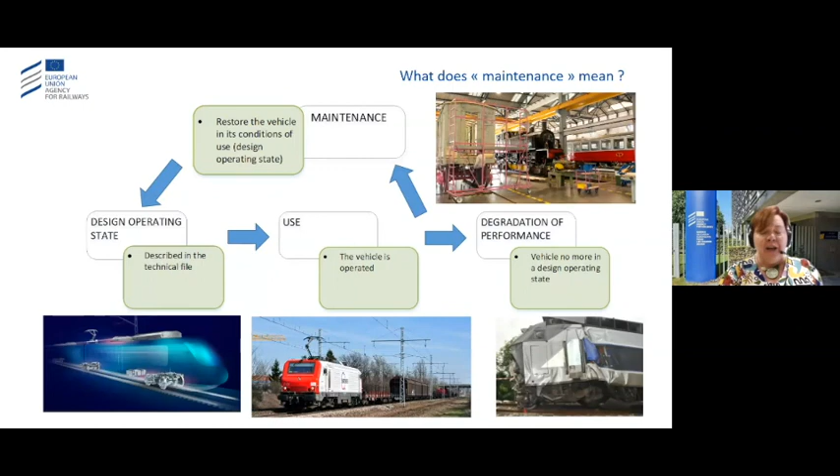Thank you, Mr. Doppelbauer, for this brilliant introduction. You say everything. So now with Jean-Marie, before giving the floor to our speaker, I would like to show you some slides and first explain what maintenance means, and give the floor to Jean-Marie. Jean-Marie is a bit the daddy of the ECM regulation and with a lot of experience, not only at the agency but also in maintenance workshops, will explain what maintenance means. Jean-Marie?

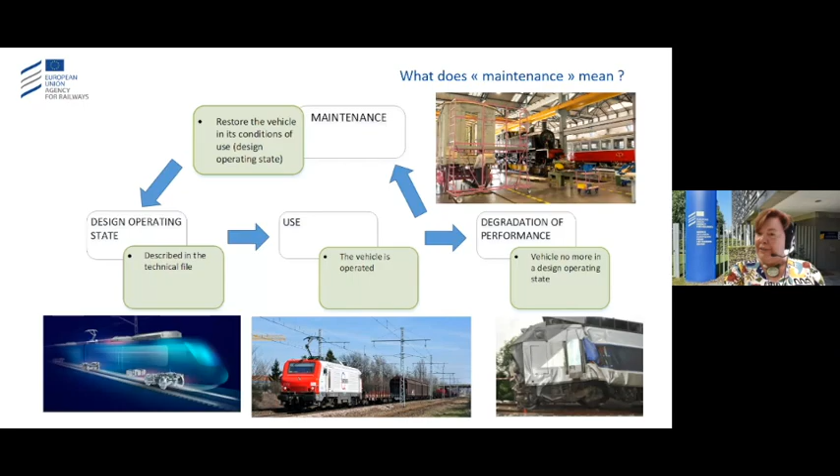I will speak about the maintenance and the ECM. Mr. Doppelbauer has spoken about the design operating state. What is this state? This state covers all the conditions that are necessary for the vehicle to be operated in a safe way to ensure safety, but also to meet the requirements addressed by the customers in terms of cost, in terms of type and frequency of operations, in terms of speed, and so on. So the use of the vehicle is clearly linked to this design operating state.

But as for any technical system, railway vehicles see a degradation of performance all along their use. Degradation of performance that can at certain moments impair the safety, but also the other requirements of the customers. And that's why we have the maintenance, and the maintenance is so important because it's the set of operations that aims to restore the vehicle to its design operating state or to a state just close to the design operating state while ensuring at least the safety, but also all the other requirements of the user.

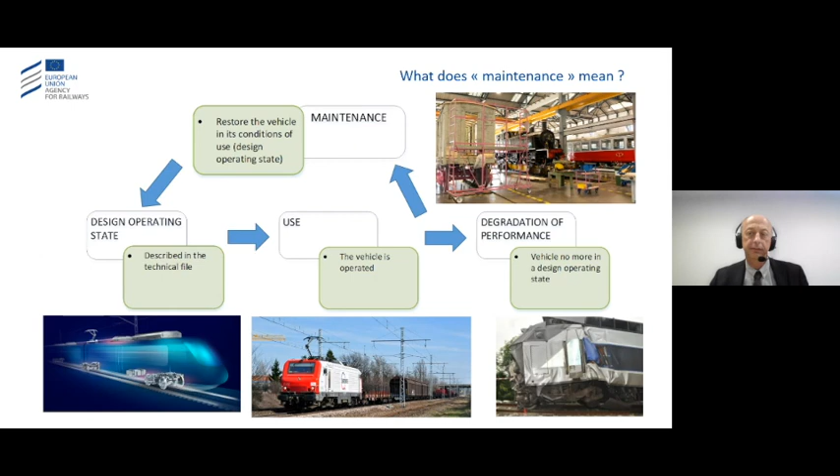Now, you know what maintenance means. But which type of vehicles? When we speak about railway vehicles, we speak about wagons, of course, wagons whose definition you can find in the TSI wagons, but we speak also about other types of vehicle, like locomotives, passenger cars, train sets, multiple units, EMU or DMU, but also on-track machines. All these vehicles need to be maintained by only one ECM. It is important to have in mind that in the National Vehicle Register, these vehicles must be registered with the name of one ECM.

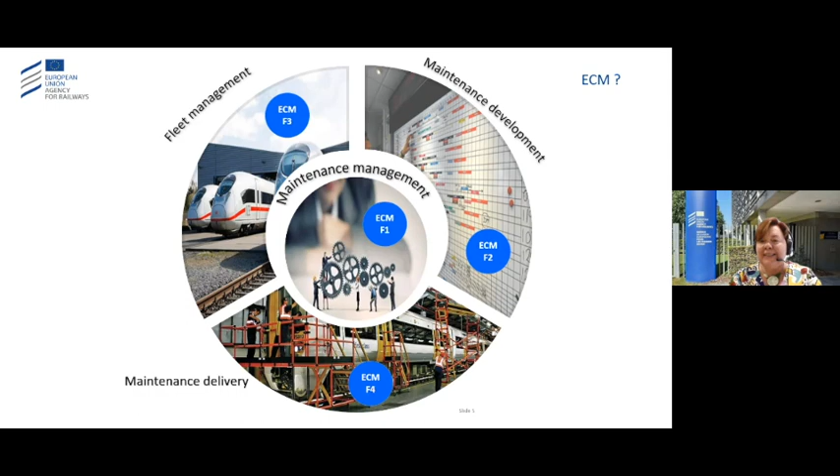Thank you, Nathalie. Now, the maintenance management system is covered by the four functions, as said by Nathalie before. We will focus a bit more on maintenance development, but on this slide you can see the link, the interface between the four management levels. The maintenance delivery needs to get maintenance orders, requests to maintain the vehicle. And of course, they also need to have the vehicles. This is provided by fleet maintenance management. But to define the tasks to be given to the maintenance delivery level, there is a strong need for a specific set of processes within the ECM, covered by maintenance development.

The output of maintenance development is, as has been said, the maintenance file, which contains on one side detailed technical documentation necessary for the maintenance, kept up to date, but also what we call the maintenance plan, meaning a set of technical activities with defined frequencies or defined milestones.

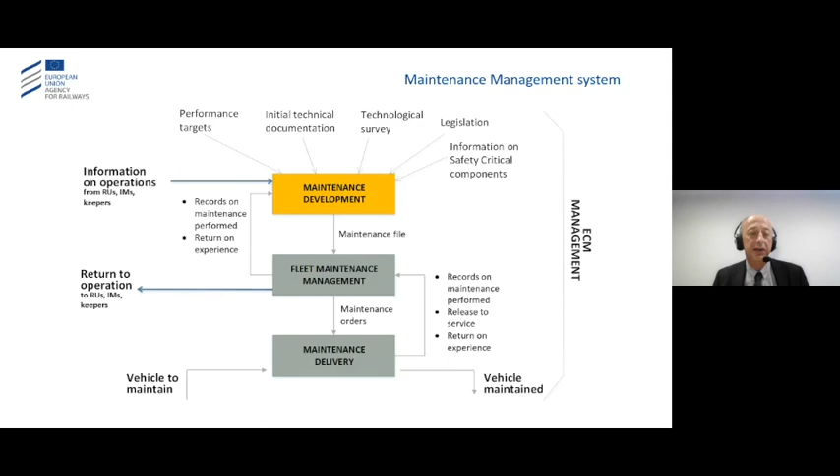Now I think that we can go, as we have fixed a bit what maintenance development means, to the experience of the ECMs represented in this webinar. Yes. Thank you, Jean-Marie. Time is running, and everybody knows that we can speak a long time about this important point. Now, I'm sure that you are very interested to hear the sector, and I would like first to give the floor to Geoffrey Tresantini, the ECM manager for CFL Cargo in Luxembourg. Geoffrey, please, could you briefly present yourself and describe your activities as ECM manager?

So I work as ECM manager for CFL Cargo since 2012. We are managing a fleet of 2,500 wagons and a few locomotives too, but those are not directly under my responsibility, so I will keep my message on wagon maintenance. The question was to maintain or not to maintain, and I think it was really interesting to answer directly: yes, we need to maintain, but we need to define how, and what is the best way to answer the most common expectations we can have with the maintenance issue.

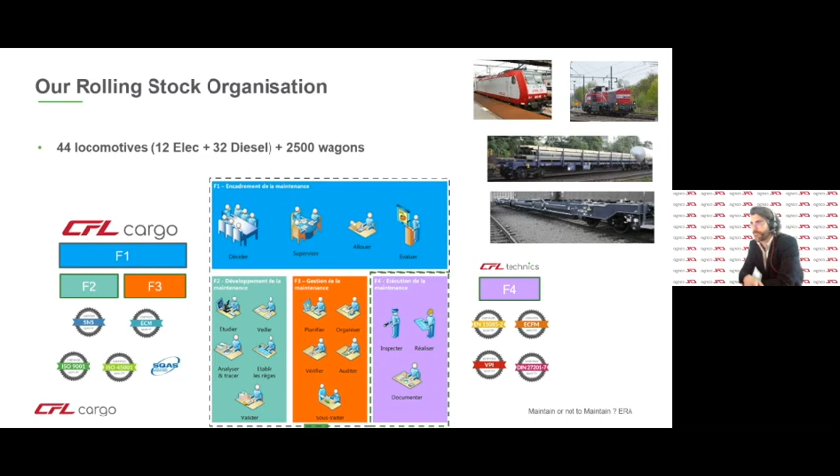First, when you are in charge of function 2, you have to consider that sometimes you have to make changes in the maintenance plan, especially because the whole railway environment is moving. You have new kinds of vehicles, new kinds of activities, new routes to follow. And due to this evolution, sometimes you have to rethink the way you take into account specific aspects like the use of wagons and the conditions, and redefine your maintenance plan to make it really

I think we lost you, Geoffrey. We cannot hear you and your camera looks frozen. So maybe there is a slight network issue, which is not a problem. Can you join again? Are you back? No, don't think so. Maybe Natalie, I will give you back the floor and we can go to the next speaker. And then if Geoffrey comes back, he will be able to end his presentation, right? Okay, no problem. We have to wait for Geoffrey to explain how he managed the maintenance plan, but to avoid wasting time, I think we can give the floor to João.

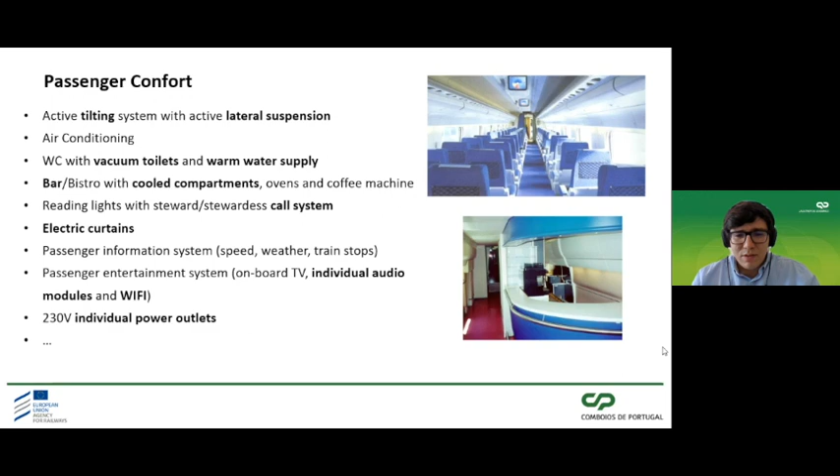Just for passenger comfort, we have many systems. Of course, the active tilting system with active lateral suspension, vacuum toilets, bar, steward call system, electrical curtains, individual audio modules, Wi-Fi, individual power outlets. So a really high equipment density along the train.

As of 2003, we had the traditional maintenance approach with standard manufacturer maintenance plans that consisted of light activity maintenances and periodic system overhauls. But we should remember that train manufacturers are just integrators of systems from different sources. So what was the traditional maintenance approach? A compilation of generic sub-supplier plans. They don't take into account the train configuration. They are independent of the operating context and weather. They are unaware of failure consequences. They are costly and mostly ineffective.

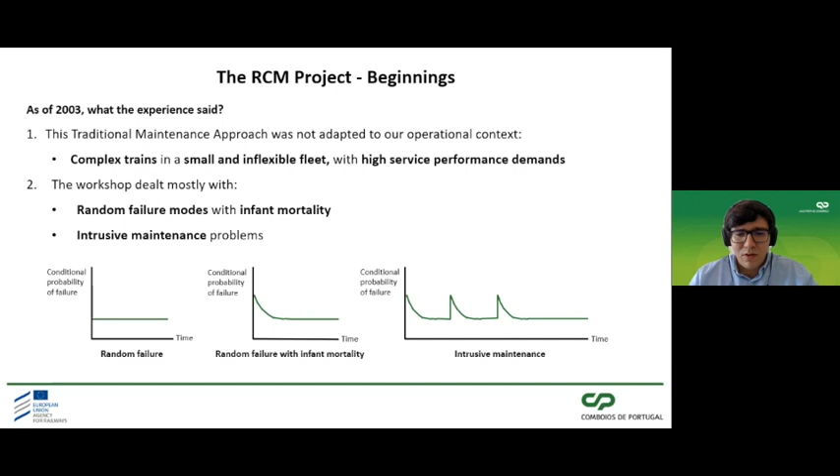So next step, RCM analysis and approval. Take a new whole system approach, seeking consequence mitigation rather than failure avoidance. The challenge of this project was, of course, to increase availability, create an environment of safety and reliability, increase fleet annual mileage, reduce life cycle costs, update EMEF maintenance business for newer and more complex trains, and to improve competitiveness of CP as an operator and EMEF as a maintenance provider.

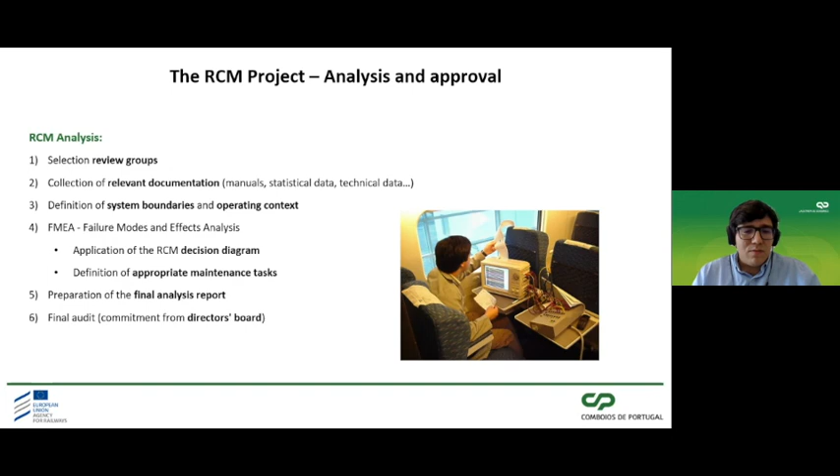For the analysis itself, we selected the review groups, collected relevant documentation, manuals, statistical data, technical data, defined the system boundaries and operating context, did an FMEA, failure modes and effects analysis, with the application of the RCM decision diagram, definition of appropriate maintenance tasks, and at the end, preparation of the final analysis report. By the end of the project, we had a final audit with a commitment from the directors board.

So as a result of this project, 70% of the maintenance tasks were new or changed, a new maintenance cycle was sketched, a new quality plan was sketched, and safety and work procedures were improved. With this 70% of the maintenance tasks that were new or changed, 49% were failure modes that didn't require maintenance, just corrective maintenance when the failure occurs.

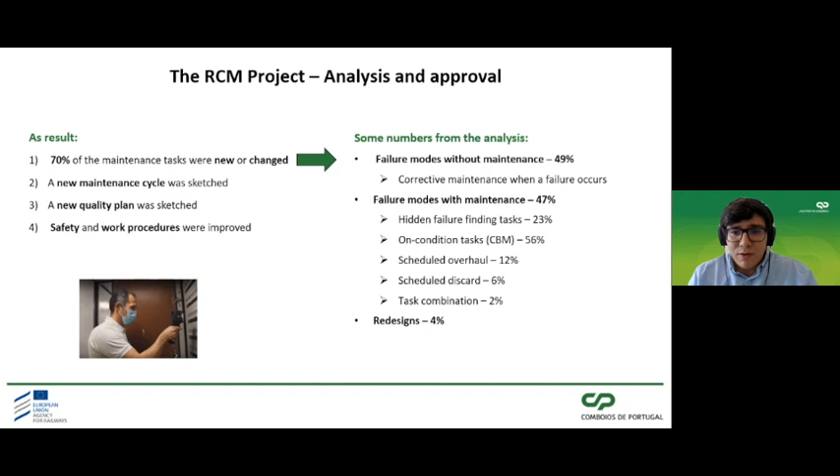And of the 47% of failure modes that do require maintenance: hidden failure finding tasks, 23%; on-condition tasks, 56%; scheduled overhauls, 12%; scheduled discards, 6%; and 2% a combination of some of them. The most important, 4% of all the failure modes required redesign.

So the RCM field implementation, the most important step in this project. It all took some changes in the maintenance and work procedures: the introduction of LRUs in the maintenance management, preparation of new maintenance documentation, work orders, implementation of new maintenance plans approved by the regulator, introduction of a wait-and-see approach and life exploration programs, introduction of new policies for spare parts repairing and overhauling, designing of a new RCM maintenance information system in-house, the PGF4000, as we can see here on the right, and the implementation of a feedback improvement process.

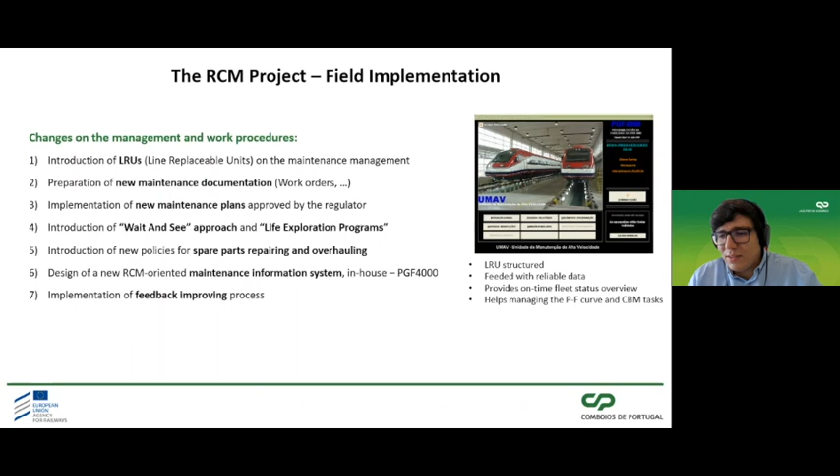So this maintenance information system that was developed in-house is LRU structured, fed with reliable data from the workshop, provides on-time fleet status overview, and helps managing the P-F curve and CBM tasks. So as I said, the feedback is really important in this process because it helps us validate our maintenance by practice and update the system with new failure consequences.

And the achievements of this project. The reliability increased, so the occurrences decreased by 50%. And what is an occurrence? It is a delay of more than 10 minutes caused by train faults. So these occurrences decreased by 50%. Our availability increased by 20%, and in the life cycle costs, we experienced a system lifespan extension.

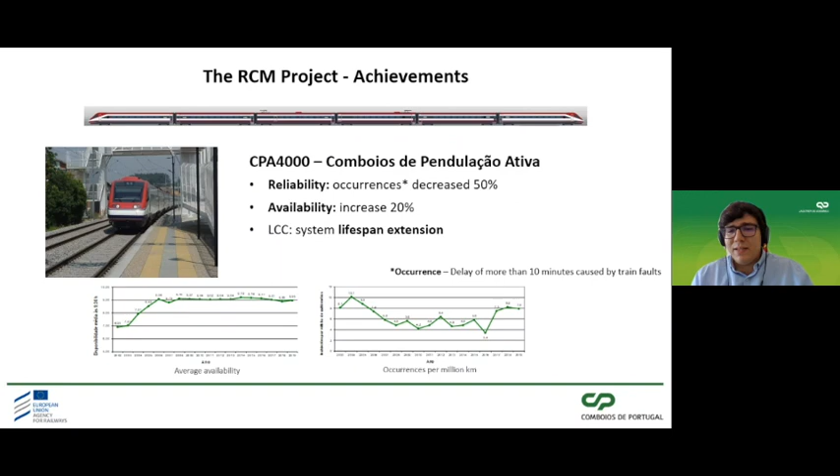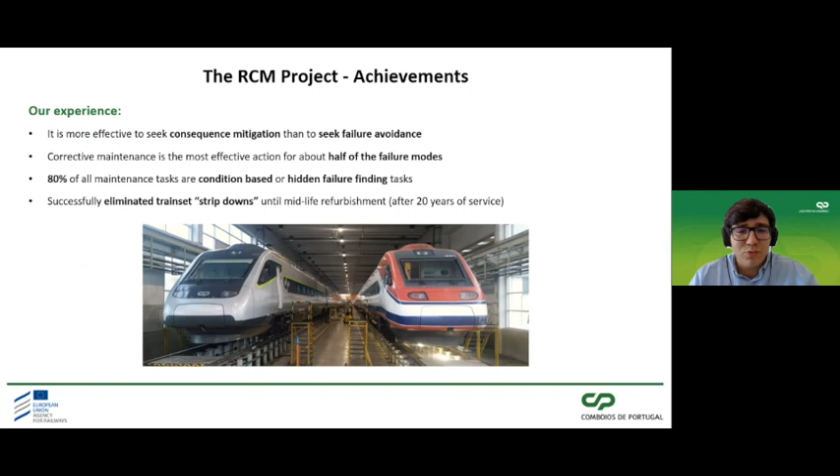From our experience, it's more effective to seek consequence mitigation than to seek failure avoidance. Corrective maintenance is the most effective action for about half of the failure modes. 80% of all maintenance tasks are condition-based or hidden failure finding tasks, and we successfully eliminated train set strip downs until the midlife refurbishment after about 20 years of service.

So this not only improves, of course, the maintenance, but the operation with increased reliability, decrease in downtime, and increase in availability, reduced costs with the optimized maintenance, reduced probability of failures with safety and environmental consequences, and brought us a positive culture shift where we increased the culture of reliability, proactive thinking, cooperation, and knowledge of the system.

It provided a new robust maintenance design justification file where maintenance decisions are justified, recorded, traceable, and auditable, preserving valuable corporate knowledge. It also optimized the list of spare parts, and this project drives subsequent updates based on experience.

In terms of availability, we can see here an increase from 2003 with 7 trains available for service to 9 trains available for service in 2006. Don't forget, our fleet at that time was just a 10 train fleet. In 2017, we started the midlife intervention, and in these years, for example 2018, we had 8.88 train availability, with just 9 trains to operate. Unfortunately, in 2020, we had 2 major accidents, and this 7.75 train availability is for an 8 train fleet, because 2 of the trains were stopped at the workshop for repairs.

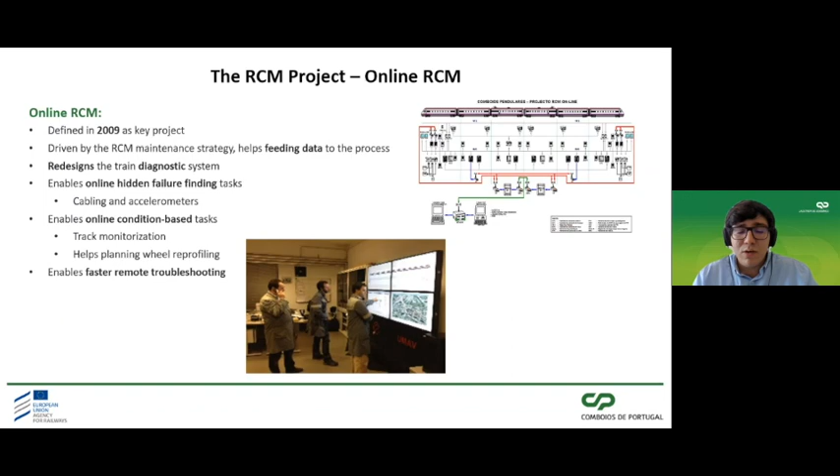So the next step forward, the online RCM. It was defined in 2009 as a key project. It was driven by the RCM maintenance strategy and helps feed data to the RCM process and project. It was a redesign of the train diagnostic system and enables online hidden failure finding tasks and online condition-based tasks without human intervention. And of course, it also enables faster remote troubleshooting when you have a problem and the train is stopped on the tracks. And thank you for your attention.

Thank you very much, João. It was very interesting. Thank you for your transparency, because sometimes it's difficult to have these types of figures. And now I would like to give the floor again to Geoffrey. He will explain in some words how he managed the change in the maintenance plan, but also give some information on the financial feedback. Geoffrey, if it is okay, the floor is yours.

Okay, thank you for giving me back the floor. I will share back the presentation.

So, as I explained before, we always try to manage the evolution of the maintenance plan in order to keep the objectives of safety, reliability, availability, and efficiency. But when you engage some changes, you can have some position about some aspects that lead to some relevant maintenance activity, and also because of the history, the return of experience you have in the past, and so on, you can also define some irrelevant maintenance activities. And all the work, all the difficulty, is to be able to identify each of them in order to avoid spending time and money in irrelevant activities.

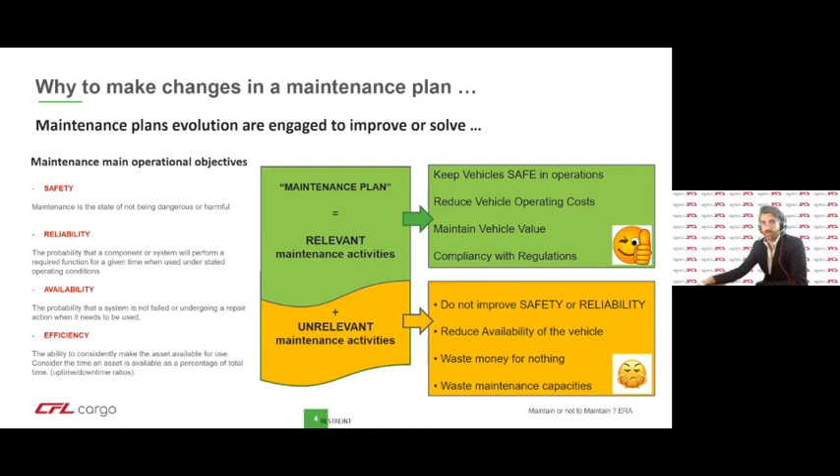So, okay, as I explained before, we are focused on the goals that are behind the changes. And because we are in charge of function 2, we have to use our main core activities to pass from the goals to the achievement. And by the way, we have to be able to list and define clearly what and how we want to follow the process to get a streamlined maintenance plan in order to avoid some easy faults that are due to the fact that we always repeat the same habits in maintenance.

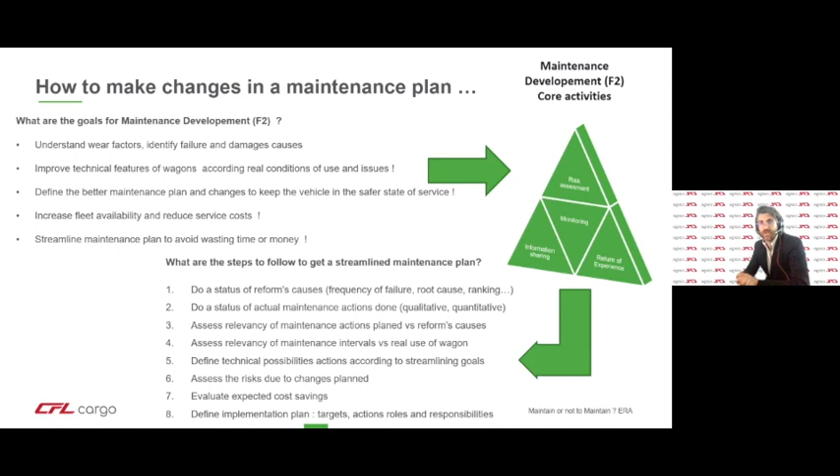And because most of the maintenance plans that we have for wagons are based on a rule-based process, we are trying to pass from rule-based to risk-based. That is the point. So first, we have to ask some questions. Here there are some examples. What are the steps to follow? What do we need to define? And all the time you are in the assessment phase, the most important thing is to take into account return of experience, information sharing, and all the monitoring you have on your fleet, on the condition of use you have, and to be really close to the field.

The common expectations, as I say, are most of the time to avoid doing overhaul or replacement of parts when there is still a running potential, to increase the relevancy of actions you do during the maintenance steps, in order to really increase safety, not just because it's planned, but because it's needed. And not because it's a rule, but because there is a risk behind. That's the point. And at the end, improve the quality, the resistance, the running potential of parts that are often damaged and under wearing limits.

You know, for our business, we have a lot of wagons that are used in the steel business. So you have some stanchions, you have some woods, shells on the wagons, and due to the kind of goods you are transporting, you have some damages, and you need to find some solution to increase this life cycle.

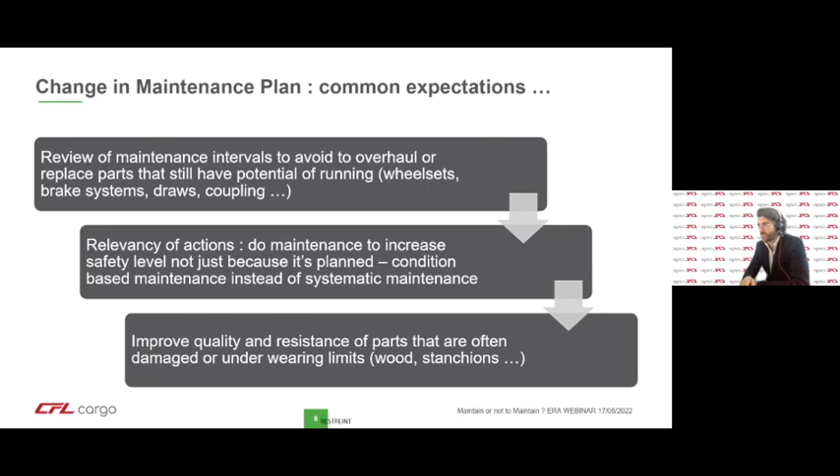So Natalie asked me what were the main difficulties to handle when you have to make maintenance plan changes. And I think there are a few of these difficulties on this slide. So first, get the relevant data about real condition of use. In our case it's quite easy because we have a fully integrated company with railway undertaking, workshops, and so on. But sometimes it's quite difficult to get the feedback from the customer or from the loader. Get the real data about wearing situation and damages, because with GCU and so on, you have part of the information about the damage, but sometimes it's not so detailed, and you can easily take conclusions that are not so relevant at the end.

A really important point is to establish the pain-gain balance of the change, because when you have to handle a change, you need to be aware that at the beginning it will cost some resources, some time, some efforts. So are you ready to do that? And do you have from your stakeholders the sponsoring that you need to do that?

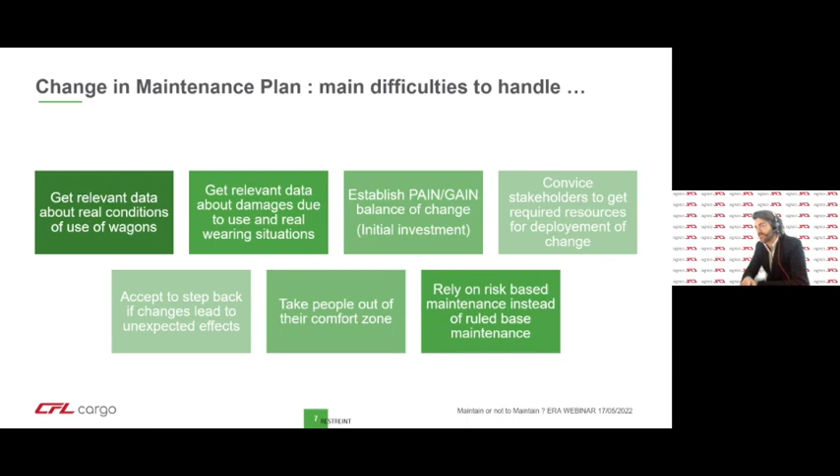At the end, you have to rely on risk-based maintenance instead of rule-based maintenance. And that's the point, because rule-based maintenance is quite easy to mind - you just have to do what is written. When you use risk-based maintenance, you have to always mind it and remind it.

So I will go deeply with this small process chart. Before handling change that can lead to all the expectations we pointed out before, you have to think some things through. First, assess the risk of changes. After that, plan how to come back to the old maintenance plan if there are severe issues or unexpected effects.

Then define how to overview and manage vehicle maintenance planning, because sometimes it's not so easy when you have thousands and thousands of vehicles. It can be a plan that takes years to be able to cover all the fleet. Find out and identify the vehicles that are concerned by the new maintenance plan, because sometimes you have to rely on several workshops in several countries, so it's not so easy to say to all the people what they have to do and when.

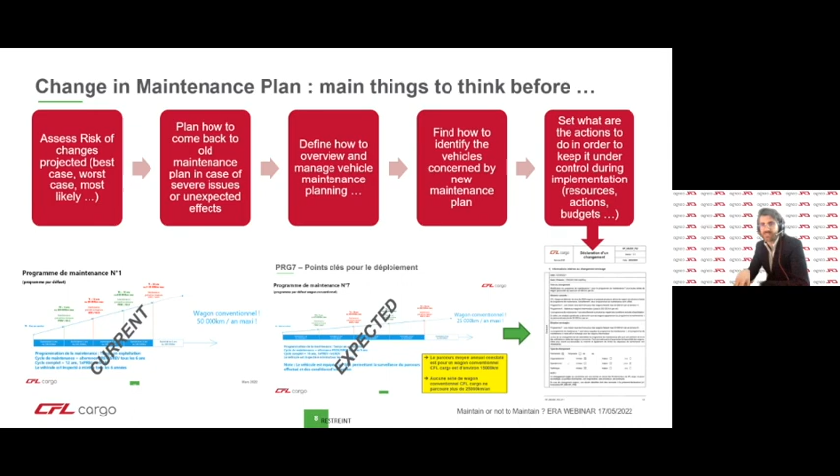Then you need to clearly set your plan on paper, I would say, and set the actions to do in order to keep it under control - who, when, why, and all the points that you need, like budget also, because it's about money, and to be clearly able to expose what is the current situation you have and what is the expected situation you want. Because if you are not able at the beginning to define it clearly, it means you will miss some really important steps for sure.

Because money is an interesting point of the maintenance plan change, and sometimes it's the first input of the way you can follow the changes you want to apply, I would show you some figures. So for our experience, over the last 5 years, but especially the last 3 years, we have deployed risk-based maintenance instead of the former rule-based maintenance plan that we used.

And we can see that we were able to keep the availability at the same level as in the past. We can keep the same level for the GCU reform rate, so for the damages that we have on vehicles and the wearing situation that we can encounter. But we have reduced the expenses for maintenance by 40%.

So in our case, it's several millions of euros each year that are saved due to the new way of thinking maintenance, and due to the fact that we are based on risk now, and we are not doing maintenance because it's written in a book that's 40 years old, but we are looking to do what is really interesting in terms of safety, availability, reliability, and efficiency.

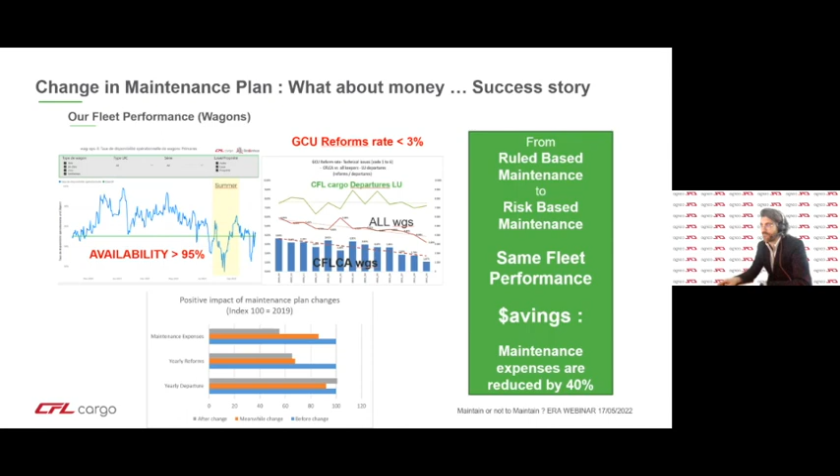And that's the end for me. So thank you for listening, and sorry for the problem with the network.